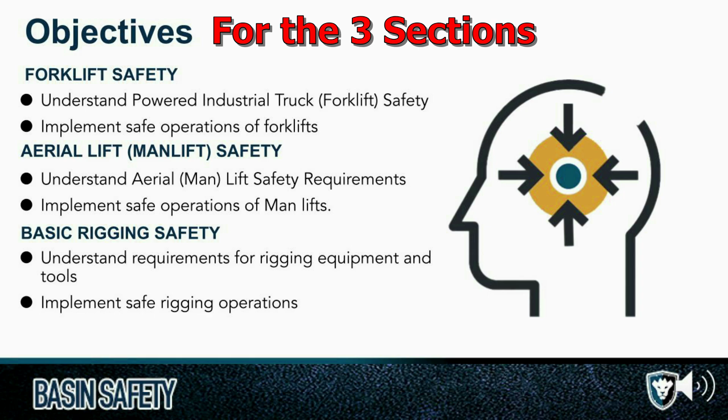Some training objectives for forklift safety: understand powered industrial truck forklift safety, implement safe operations of forklifts. For aerial lift, man lift safety, understand aerial lift, man lift safety requirements, implement safe operations of man lifts. And for basic rigging safety, understand requirements for rigging equipment and tools, and implement safe rigging operations.

First up, industrial trucks. Powered industrial truck and forklift types. OSHA recognizes 11 different designations of industrial trucks divided into 7 classes. Each type of vehicle has specific safeguards. The employer must select the proper type of vehicle to match the hazard profile of the work environment.

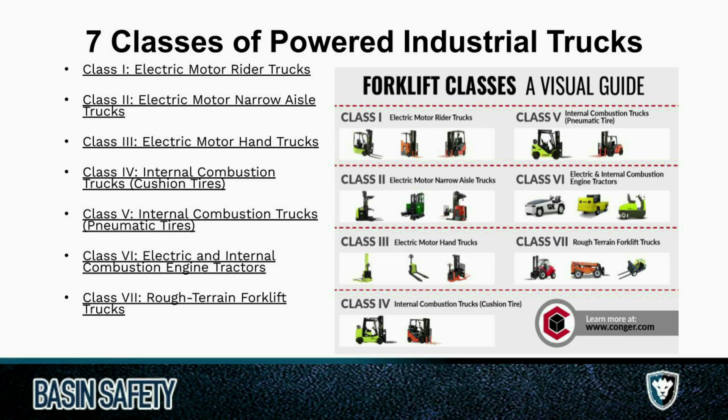7 classes of powered industrial trucks. Class 1, electric motor rider trucks. Class 2, electric motor narrow aisle trucks. Class 3, electric motor hand trucks. Class 4, internal combustion trucks with cushion tires. Class 5, internal combustion trucks with pneumatic tires. Class 6, electrical and internal combustion engine tractors. And Class 7, rough terrain forklift trucks. And to the right here, we have a forklift classes, a visual guide.

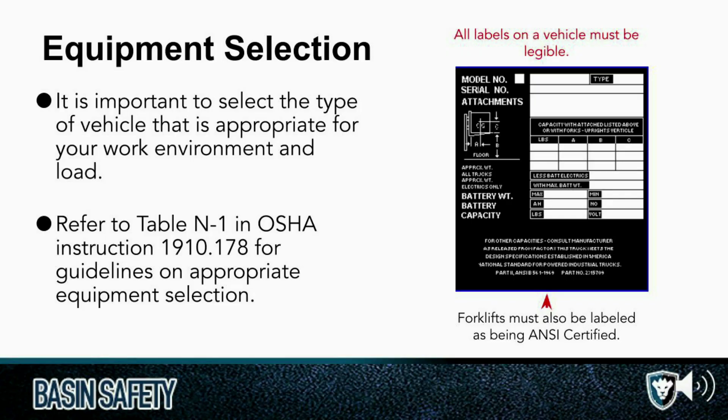Equipment selection. It is important to select the type of vehicle that is appropriate for your work environment and load. Refer to Table N1 in OSHA Instruction 1910.178 for guidelines on appropriate equipment selection. All labels on a vehicle must be legible. Forklifts must also be labeled as being ANSI certified.

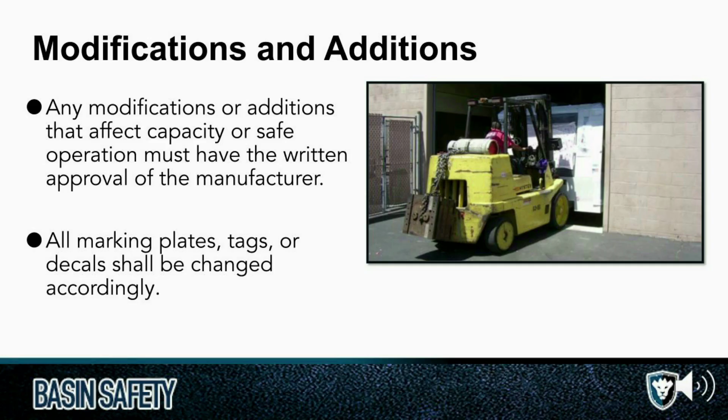Modifications and additions. Any modifications or additions that affect capacity or safe operation must have the written approval of the manufacturer. All marking plates, tags, or decals shall be changed accordingly.

Some atmospheric requirements. Powered industrial trucks can cause fires or other dangers in certain types of environments. Powered industrial trucks are not allowed to be used in atmospheres containing hazardous concentrations of acetylene, butadiene, ethyl oxide, hydrogen, propylene oxide, acetaldehyde, cyclopropane, diethyl ether, ethylene, unsymmetrical dimethyl hydrazine. Section 1910.178 has specific requirements about atmospheric requirements. If your workplace has atmospheric contaminants, consult the rules for proper vehicle selection.

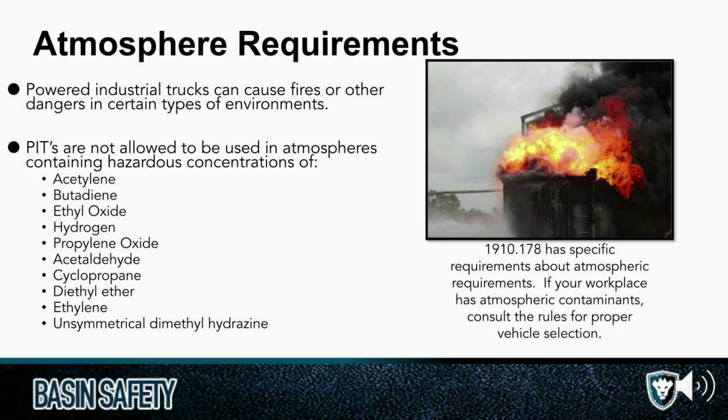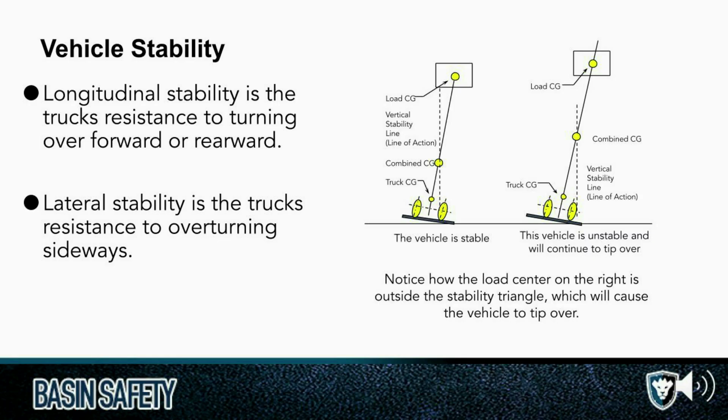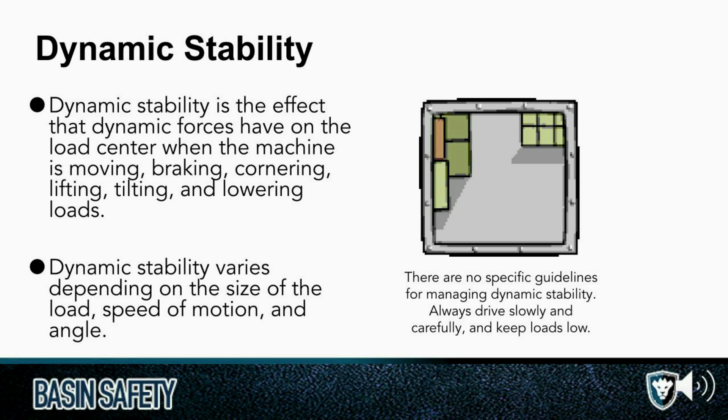Vehicle stability. Longitudinal stability is the truck's resistance to turning over forward or rearward. Lateral stability is the truck's resistance to overturning sideways. Notice how the load center illustrated on the right is outside the stability triangle, which will cause the vehicle to tip over. Dynamic stability is the effect that dynamic forces have on the load center when the machine is moving, braking, cornering, lifting, tilting, and lowering loads. Dynamic stability varies depending on the size of the load, speed of motion, and angle. There are no specific guidelines for managing dynamic stability. Always drive slowly and carefully and keep loads low.

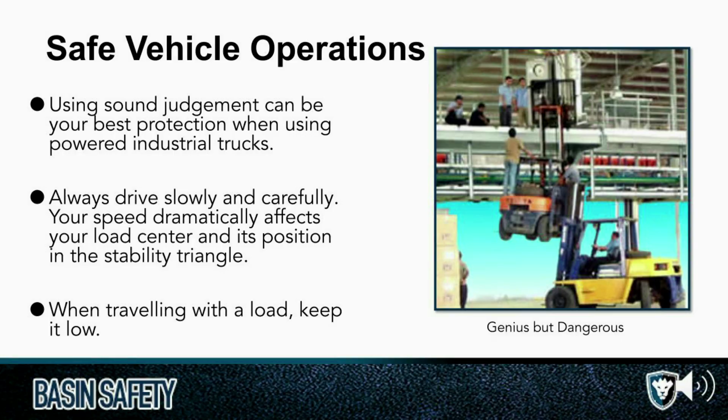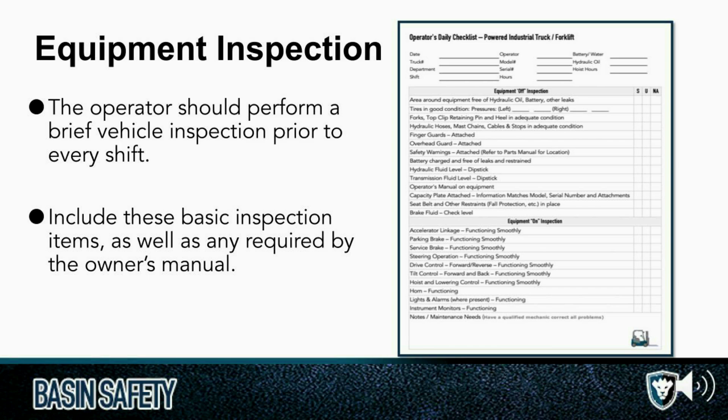Equipment inspection. The operator should perform a brief vehicle inspection prior to every shift. Include these basic inspection items as well as any required by the owner's manual. To the right is an illustration of an operator's daily checklist for powered industrial truck and forklift.

Working on and around vehicles. Do not drive trucks up to people standing or sitting in front of fixed objects. People should not pass below elevated portions of the truck. Only vehicles designed for carrying a passenger may have one. Arms and legs may not be placed outside the mast or the running lines of the vehicle while operating it.

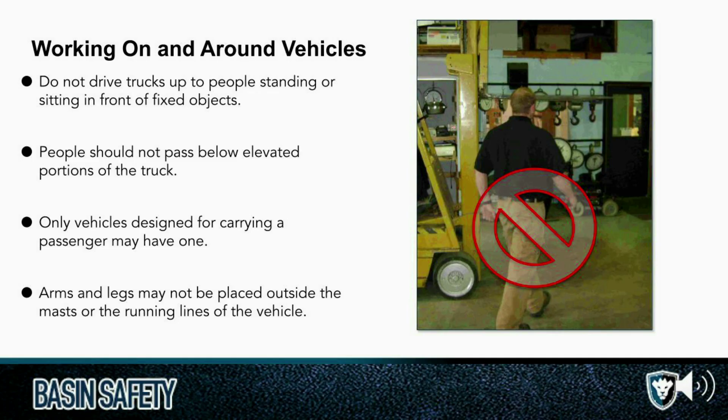Some vehicle entry and exit examples. Always enter and leave a powered industrial truck facing the vehicle. If a sit-down vehicle tips over, remain seated in the operator's seat and lean away from the direction of the fall. If a stand-up rider truck tips over, step backwards off the vehicle to get clear. Most people attempt to jump clear of a tipping vehicle and are crushed by the overhead guard.

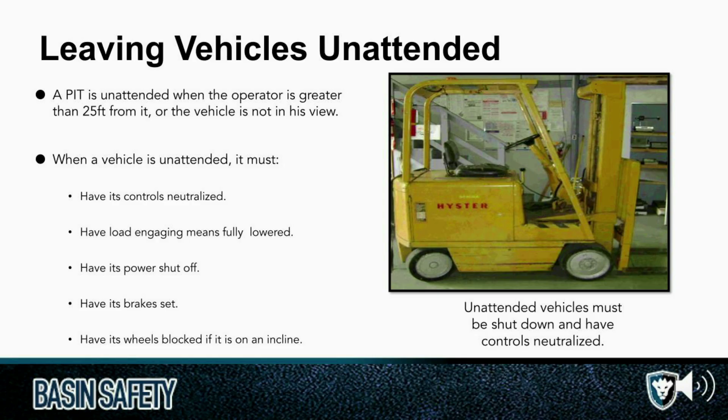Leaving vehicles unattended. A powered industrial truck is unattended when the operator is greater than 25 feet from it or the vehicle is not in his view. When a vehicle is unattended, it must have its controls neutralized, have load engaging means fully lowered, have its power shut off, have its brakes set, and have its wheels blocked if it is on an incline. Unattended vehicles must be shut down and have controls neutralized.

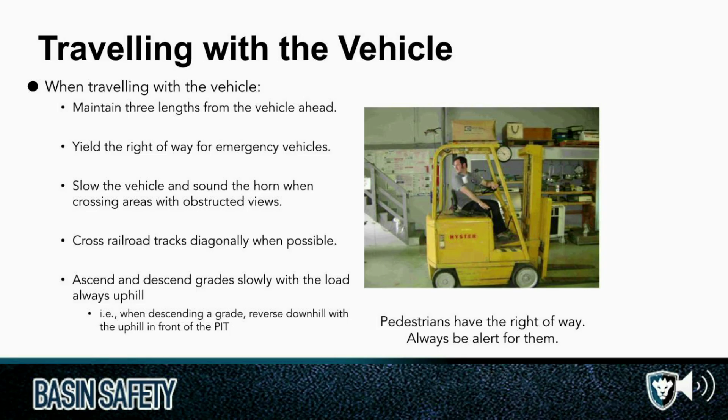Traveling with the vehicle. When traveling, maintain 3 lengths from the vehicle ahead of you. Yield the right-of-way for emergency vehicles. Slow the vehicle and sound the horn when crossing areas with obstructed views. Cross railroad tracks diagonally when possible. Ascend and descend grades slowly with the load always uphill. When descending a grade, reverse downhill with the uphill in front of the powered industrial truck. Pedestrians have the right-of-way. Always be alert for them.

For loading, only stable and safely arranged loads should be handled. Loads must be well below the rated capacity of the vehicle. Trucks with attachments must be operated as partially loaded trucks even when not carrying a load. Before engaging a load, make sure it is below the rating of your vehicle.

For maintenance, vehicles not in a safe operating condition must be removed from service. Only authorized personnel can make repairs. Repairs to fuel and ignition systems must be made in designated areas. The battery must be disconnected before repairs on the electrical system can occur.

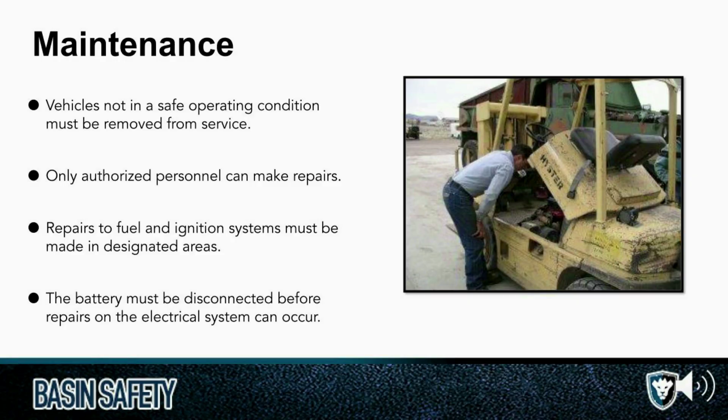Training requirements. This is not a forklift operator training course. No one is allowed to drive powered industrial trucks until they have been trained, certified, and authorized by the employer. The minimum age to drive one is 18 years of age. Trainees must always be supervised while operating.

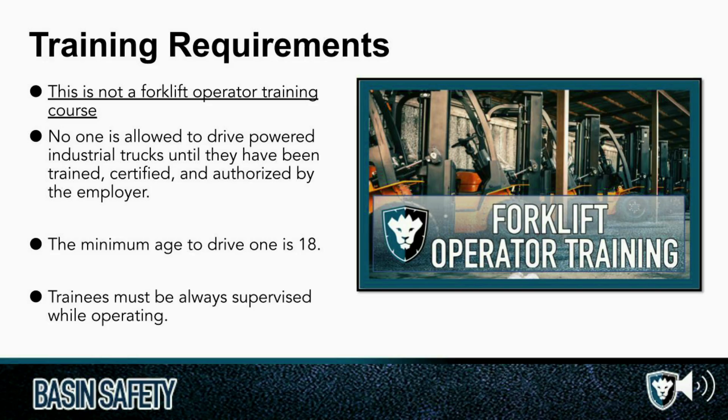The minimum age to drive a powered industrial truck is 18 years of age. Employees must be trained and evaluated in forklift operations prior to operating them alone.

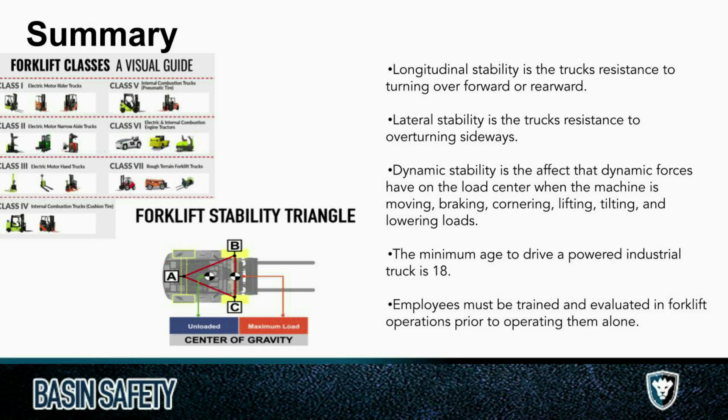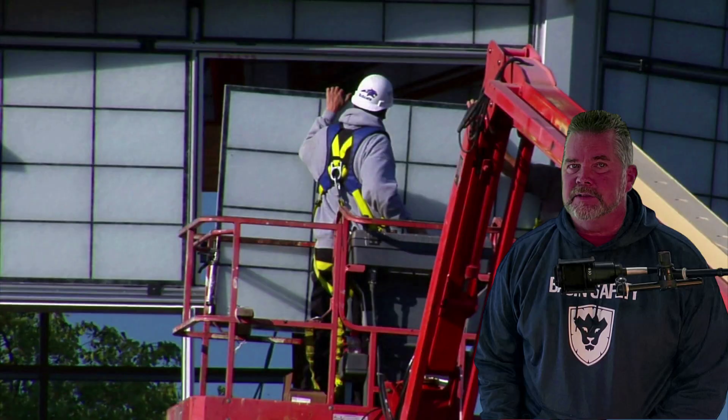Next up, non-qualified aerial lift safety training. Every year, thousands of workers are seriously injured or worse because of mistakes made on aerial lifts. These machines may look simple, but they're among the most dangerous pieces of equipment on a job site if you don't respect the hazards. Falls, tip-overs, electrocution, crushing accidents - they happen fast and often without warning. That's why today's training is so important. We're going to cover the critical rules, real-life examples, and safe work practices you need to know before you ever step onto an aerial lift. Because when it comes to working at height, safety isn't just optional, it's about survival.

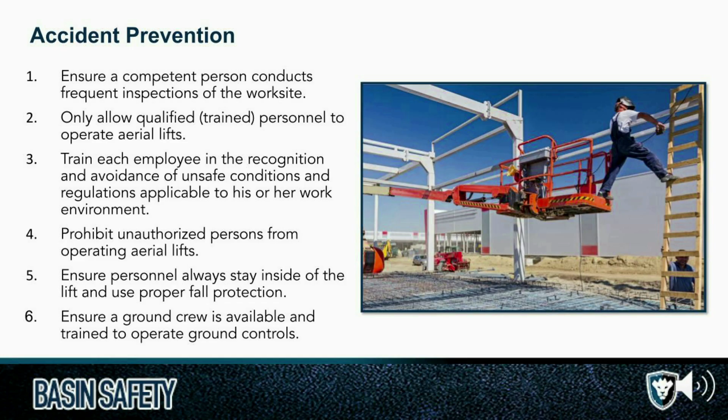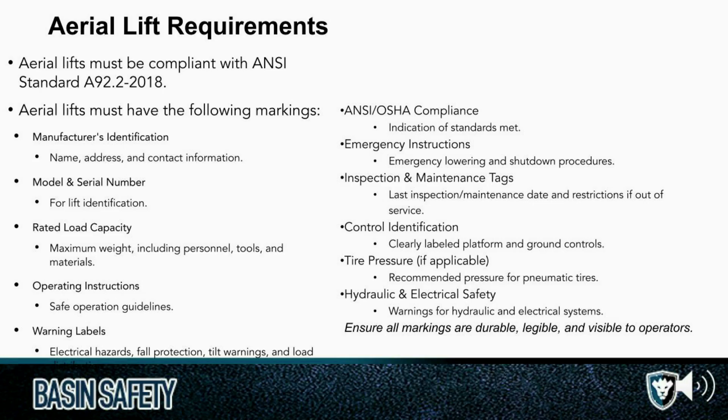Aerial lift requirements. Aerial lifts must be compliant with ANSI Standard A92.2-2018. Aerial lifts must have the following markings: manufacturer's identification - name, address, and contact information; the model and serial number for lift identification; the rated load capacity, maximum weight including personnel, tools, and materials; operating instructions for safe operation guidelines; warning labels for electrical hazards, fall protection, tilt warnings, and load distribution; ANSI and OSHA compliance indication of standards met; emergency instructions for emergency lowering and shutdown procedures; inspection and maintenance tags showing last inspection maintenance date and restrictions if out of service; control identification with clearly labeled platform and ground controls; tire pressure if applicable on the vehicle, recommended pressure for pneumatic tires; and hydraulic and electrical safety warnings. Ensure all markings are durable, legible, and visible to operators.

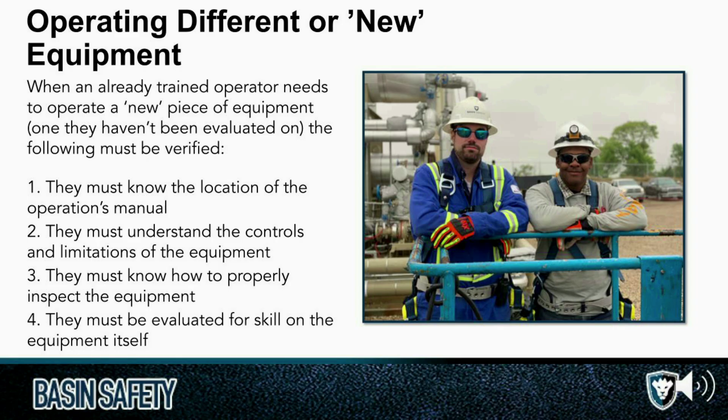Part 3, Aerial Lift Inspection and Maintenance Records.

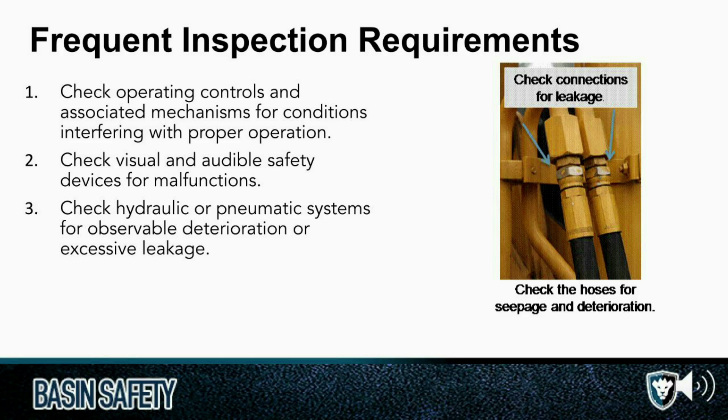Frequent inspection requirements. Number 1, check operating controls and associated mechanisms for conditions interfering with proper operation. Number 2, check visual and audible safety devices for malfunctions. Number 3, check hydraulic or pneumatic systems for observable deterioration or excessive leakage. Check connections for leakage, check the hoses for seepage and deterioration.

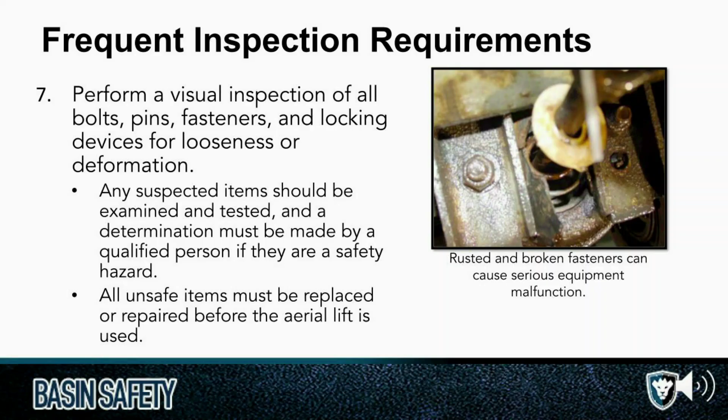Continued here with point 7. Perform a visual inspection of all bolts, pins, fasteners, and locking devices for looseness or deformation. Any suspected items should be examined and tested, and a determination must be made by a qualified person if they are a safety hazard. All unsafe items must be replaced or repaired before the aerial lift is used. Rusted and broken fasteners can cause serious equipment malfunction.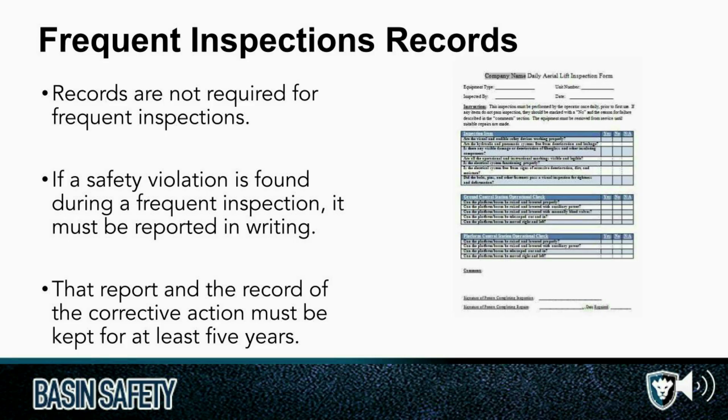Frequent inspection records. Records are not required for frequent inspections. If a safety violation is found during a frequent inspection, it must be reported in writing. That report and the record of the corrective action must be kept for at least 5 years.

Maintenance requirements. Type and frequency of maintenance will be determined by the owner in accordance with the manufacturer's recommendations. The owner must train employees on inspection and maintenance of the aerial device in accordance with the manufacturer's recommendations. All maintenance must be done in accordance with manufacturer's recommendations.

Aerial lift modifications. No modifications or additions that affect vehicle stability, mechanical, hydraulic, or electrical integrity, or safe operation may be made without prior written permission from the manufacturer. If these changes are made, the instructional markings must be changed accordingly.

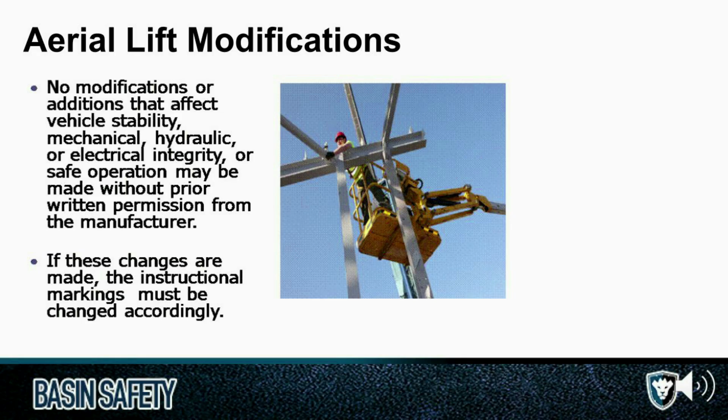Part 4, Aerial lift operations. Pre-start inspection: aerial devices must be inspected prior to each day's operation. The operator must perform the inspection in accordance with the frequent inspection requirements. All unsafe items must be replaced or repaired before use. Here's an example of an inspection sheet to the right.

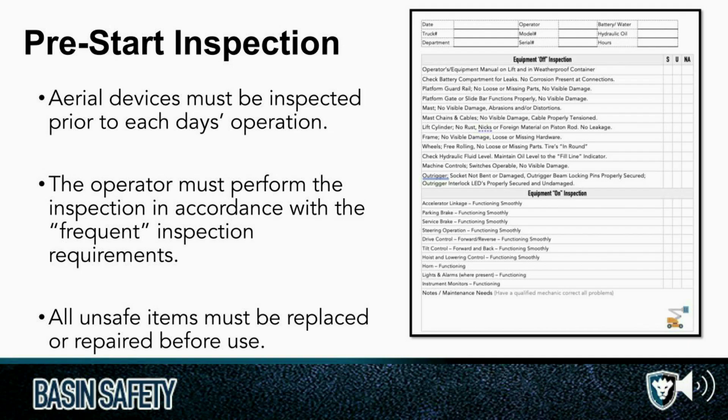Weather conditions to be aware of. Before using aerial lifts outdoors, weather conditions should be checked. Lifts should not be used when there are storms, high winds, or the possibility of lightning.

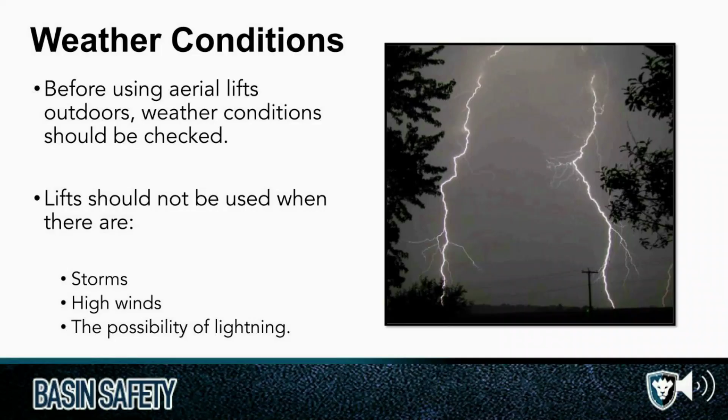Work area hazard survey. Before an aerial device is used, the work area must be surveyed for hazards such as unstable soil or earth, holes, ditches, drop-offs and floor obstructions, debris, overhead obstructions, possible electrical contacts, and presence of unauthorized persons. Aerial lifts may not be used unless these hazards are managed or eliminated. Potholes and ditches are hazardous and should be avoided.

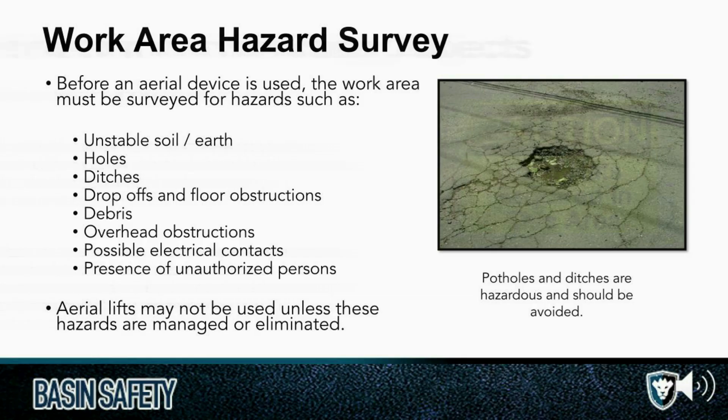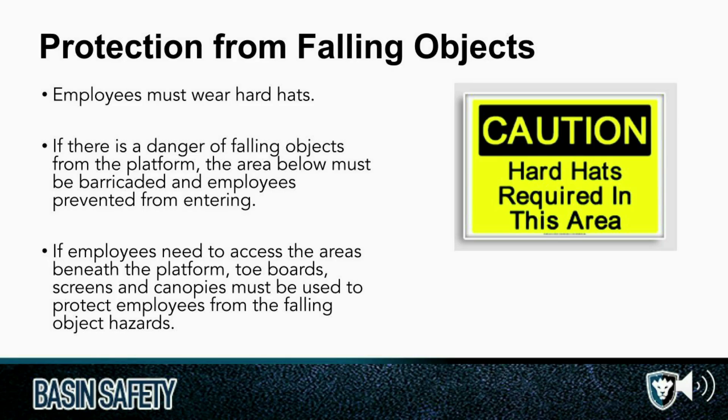Protection from falling objects. Employees must wear hard hats. If there is a danger of falling objects from the platform, the area below must be barricaded and employees prevented from entering it. If employees need to access the areas beneath the platform, toe boards, screens, and canopies must be used to protect employees from falling object hazards. And if you see this sign to the right, caution, hard hats required in this area, of course, don your hard hat.

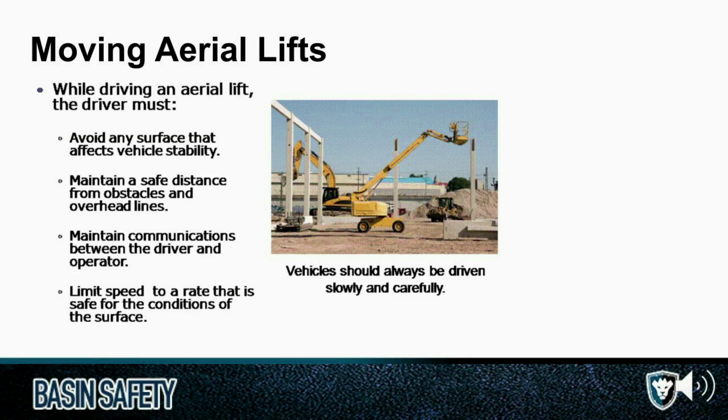Moving aerial lifts. When driving an aerial lift, the driver must avoid any surface that affects vehicle stability, maintain a safe distance from obstacles and overhead lines, maintain communication between the driver and operator, and limit speed to a rate that is safe for the conditions of the surface. Vehicles should always be driven slowly and carefully.

Working requirements. Employees must stand on the floor of the basket and cannot sit or climb on the guardrails or use other devices to establish work positions. A harness attached to the boom or basket must be worn. Harnesses should be connected to a lift structural member anchor point. Guardrails must be installed. Never exceed the load capacity of the aerial lift. Do you know what your aerial lift capacity is? Good thing to find out.

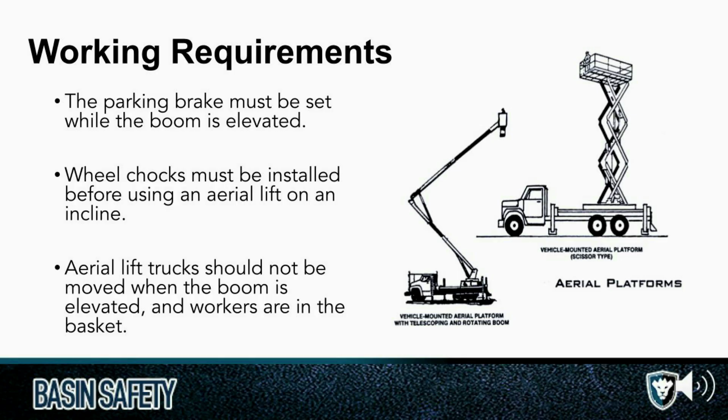Working requirements. The parking brake must be set while the boom is elevated. Wheel chocks must be installed before using an aerial lift on an incline. Aerial lift trucks should not be moved when the boom is elevated and workers are in the basket.

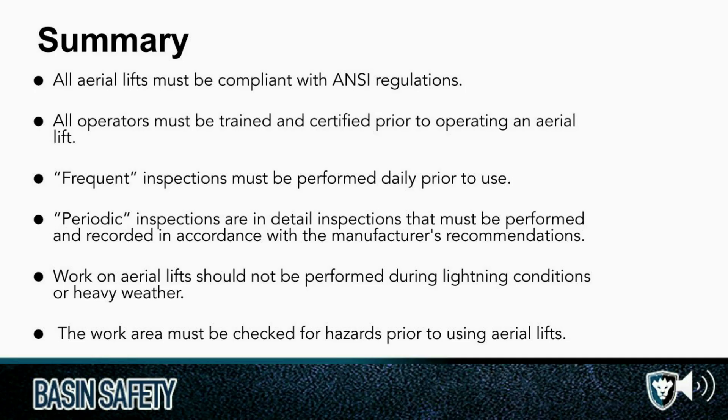In summary, all aerial lifts must be compliant with ANSI regulations. All operators must be trained and certified prior to operating an aerial lift. Frequent inspections must be performed daily prior to use. Periodic inspections are in-detail inspections that must be performed and recorded in accordance with the manufacturer's recommendations. Work on aerial lifts should not be performed during lightning conditions or heavy weather. The work area must be checked for hazards prior to using aerial lifts.

Next up, non-qualified rigging safety training. Rigging is one of the most critical and dangerous tasks on a job site. A single mistake in choosing the wrong sling, ignoring a load's center of gravity, or rushing a lift can turn a routine job into a disaster in seconds. Every year, workers are injured and millions of dollars in equipment are lost because someone cut corners on rigging safety.

That's why today's training matters. We're going to cover the fundamentals of safe rigging, real-world accidents you can learn from, and the right practices that keep both people and property safe. Because when it comes to lifting heavy loads, the margin for error is zero.

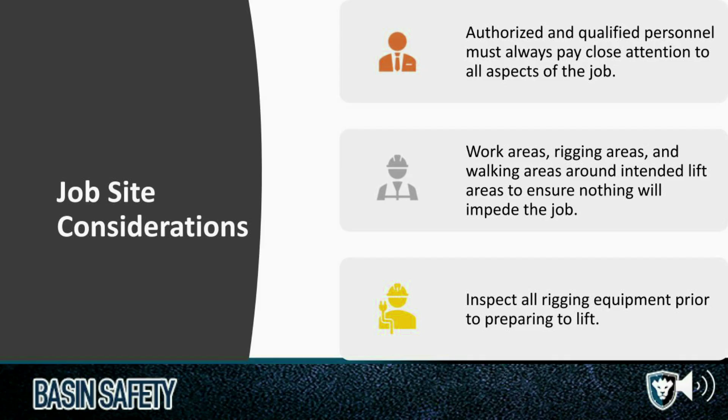Number 1, selecting your rigging. Knowledgeable personnel should select the rigging. Number 2, rigging condition must be of the appropriate type, have proper identification, and been inspected and is certified. Number 3, load limits, load weight, center of gravity, sling angle, side loading considerations, and gear capacity.

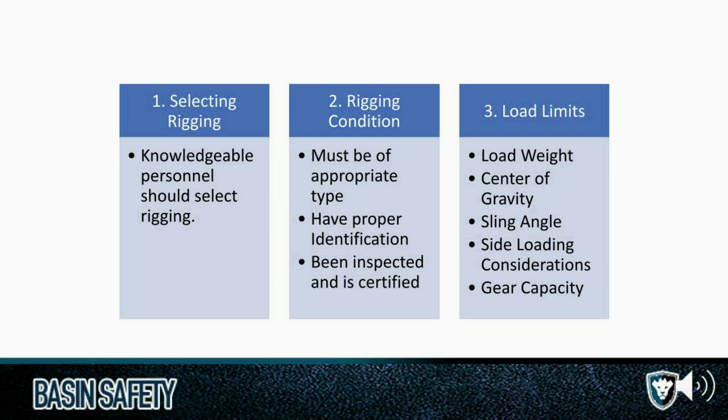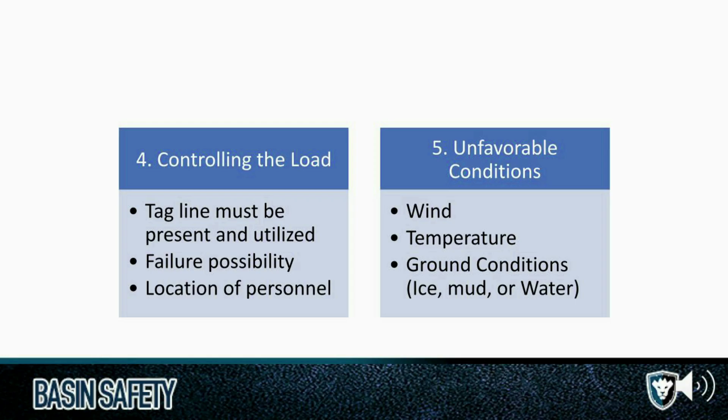Number 4, controlling the load. Tagline must be present and utilized, must be aware of failure possibility and location of personnel. Number 5, unfavorable conditions, high winds, temperature, ground conditions such as ice, mud, or water.

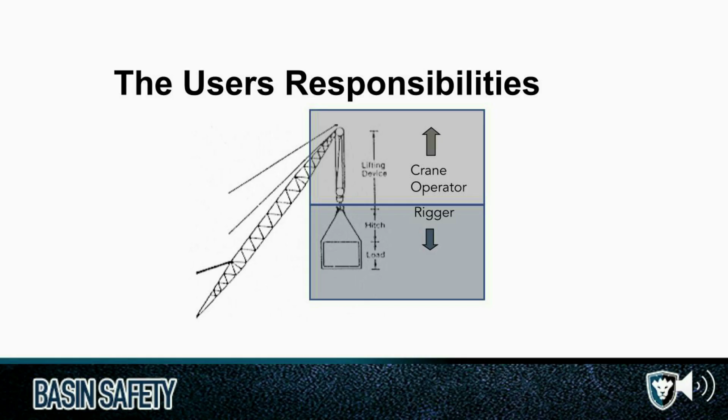The user's responsibility. Above the line illustrated here is the crane operator's responsibility. Below the line is the rigger's responsibility. The rigger's responsibilities, UFC: Utilize, Follow, and Conduct. Utilize appropriate rigging gear suitable for overhead lifting. Follow industry standards and the manufacturer's recommendations. Conduct regular inspection and maintenance of the rigging gear.

Inspection requirements. Daily inspection should be performed at the beginning of each shift or before initial use of the crane, each shift by the operator or appointed person.

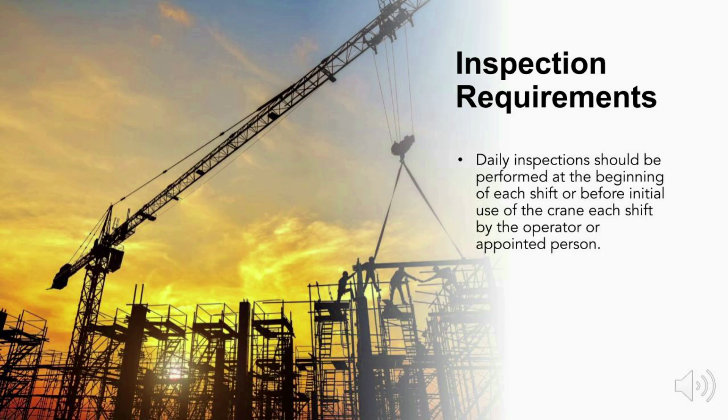Some notes about slings. Sling capacity varies from manufacturer to manufacturer. User must look at individual sling capacity tag to determine safe lifting capacity of that sling. If the tag is not readable or missing, do not use it. Inspect sling before each day's use and as often as necessary during the day. Sharp edges can sever a sling immediately when the load is tensioned. Use softeners or padding on corners.

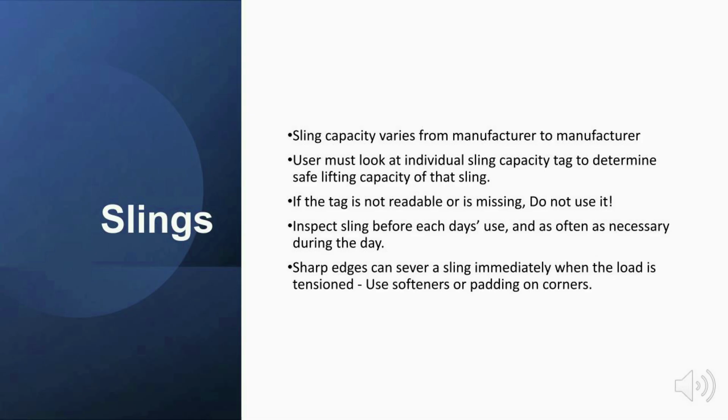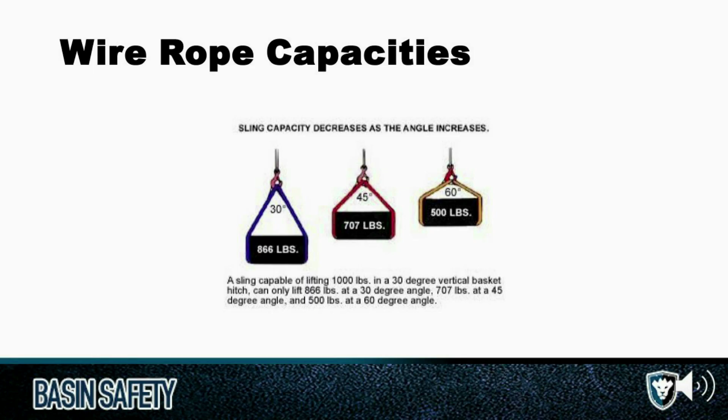Here's some examples of types of wire rope slings. Wire rope capacities: sling capacity decreases as the angle increases. At 30 degrees, 866 pounds. At 45 degrees, 707 pounds. At 60 degrees, 500 pounds. A sling capable of lifting 1,000 pounds in a 30-degree vertical basket hitch can only lift 866 pounds at a 30-degree angle, or 707 pounds at a 45-degree angle, and 500 pounds at a 60-degree angle.

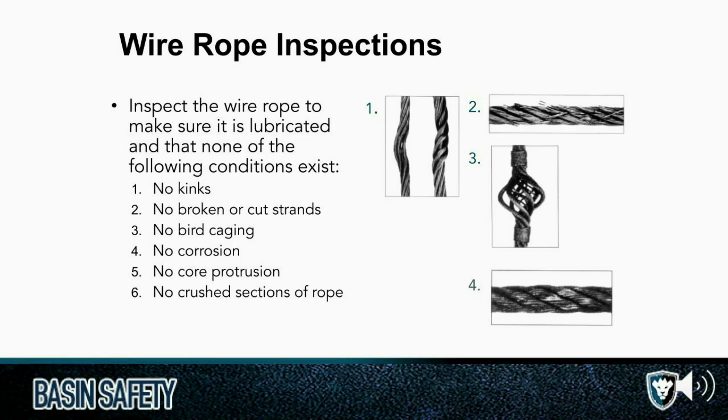Wire rope inspections. Inspect the wire rope to make sure it is lubricated and that none of the following conditions exist: Number 1, no kinks. 2, no broken or cut strands. 3, no bird caging. 4, no corrosion. 5, no core protrusion. And 6, no crushed sections of the rope.

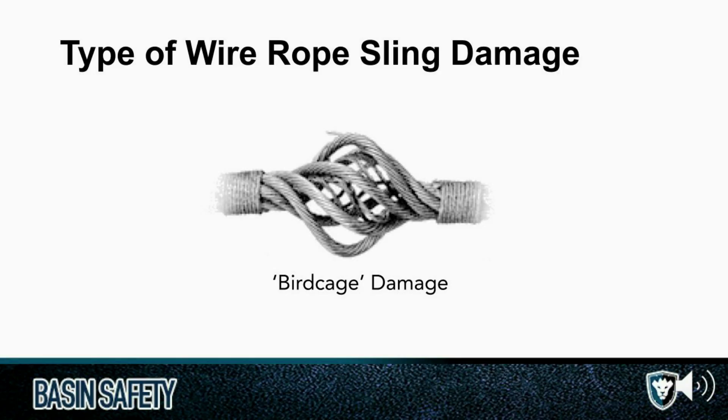Type of wire rope sling damage. This example is a bird cage damage. Type of wire rope sling damage. Damage as a result of a kink in the wire rope.

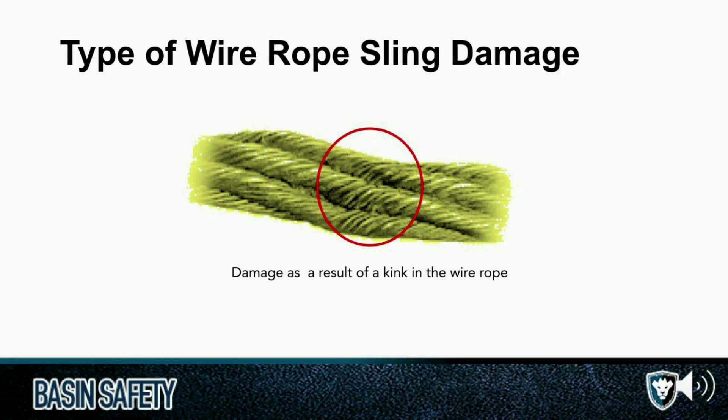Synthetic slings. A synthetic sling is a type of lifting device made from durable synthetic materials such as nylon, polyester, or polypropylene designed to securely lift and transport loads. These slings are widely used in industries like construction, manufacturing, and logistics due to their flexibility, strength, and lightweight design. Synthetic slings must be inspected before each use for signs of wear, damage, or chemical degradation to ensure safe operation. Always adhere to manufacturer guidelines for load capacity and proper use.

Chain slings. Only grade 8 or better alloy chain can be used for overhead lifting purposes. All chain is not rated the same. Chain must have a capacity tag attached to it. Chains will withstand more rough handling and abuse, but a chain with the same rated lifting capacity of wire rope will be much larger in diameter and heavier in weight.

Chains must be inspected daily before use and as often as necessary during use to assure safety. It is the rigger's responsibility to do the inspections. Some examples of chain slings.

Rigging protection from cutting or slipping. Softeners, padding, or use of blocking in these examples.

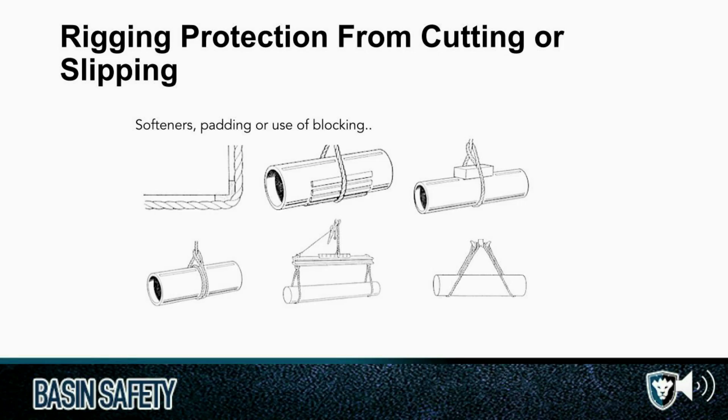Basic sling operating practices, according to ANSI B30.9. Each day before use, the sling, all fastenings, and attachments shall be inspected for damage and defects by a competent person. Additional inspections shall be performed during sling use as often as necessary to assure the safety of the operation.

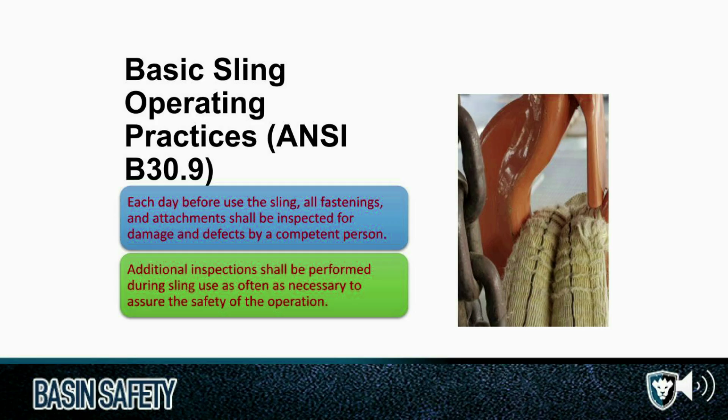Basic sling operating practices, again ANSI B30.9. Replacement criteria.

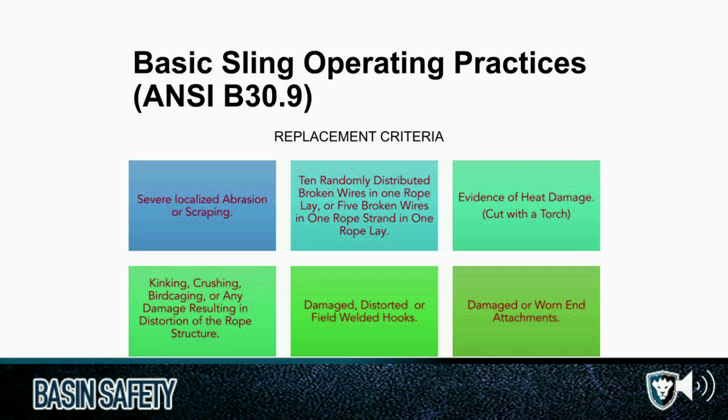Some safety factors. To guard against failure of a wire rope in service, the actual load on the rope should only be a fraction of the breaking strength. The safety factor includes reduced capacity of the rope below its stated breaking strength due to wear, fatigue, corrosion, abuse, and variations in size and quality.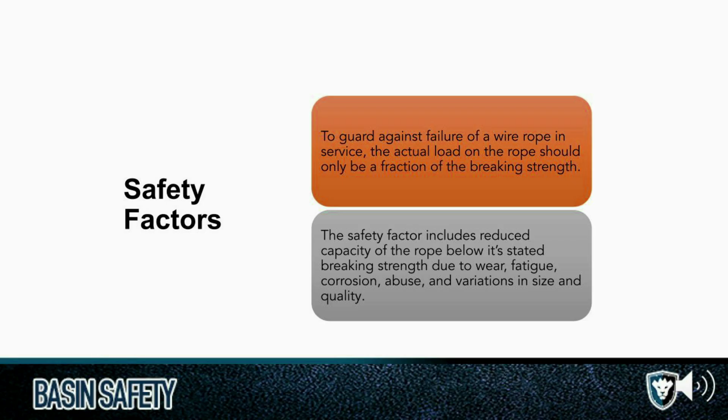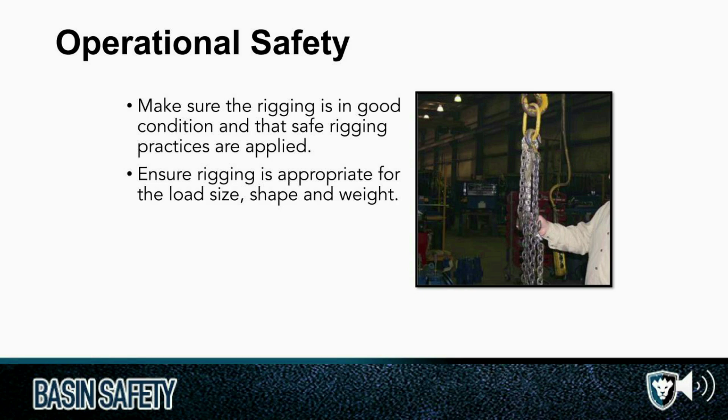Operational safety. Make sure the rigging is in good condition and that safe rigging practices are applied. Ensure rigging is appropriate for the load size, shape, and weight.

functioning properly before continuing with the lift. Operational safety. Do not overload the crane or hoist. Make sure the combined weight of the lifter and load does not exceed the rated load capacity of the crane or hoist. Refuse to make lift if you are unsure of any issues. Do not proceed until all issues are resolved. Operator is in control of the lift and has complete authority to stop the lift for any safety reason.

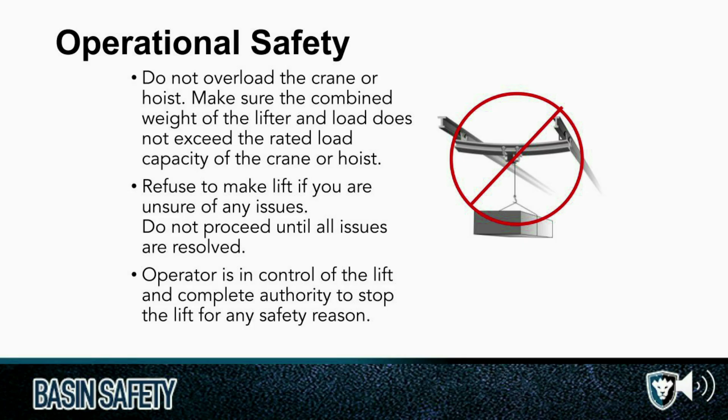Operational safety. Only allow one person to give hand signals. Do not ride or allow other people to do so.

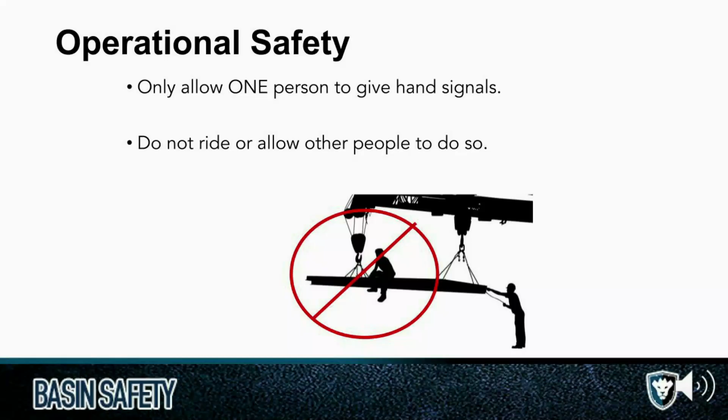Operational safety. To pick up a load, direct the crane and hoist hook directly above the load to eliminate the possibility of side loading and minimize load swing.

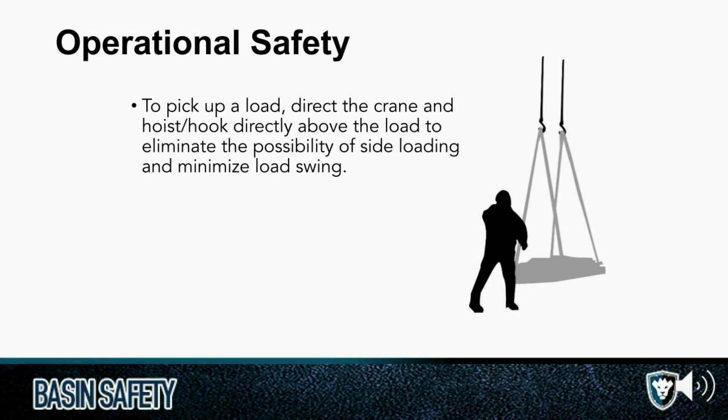Operational safety. Always maintain a clear view of the crane path so you can observe any obstacles or personnel in your path.

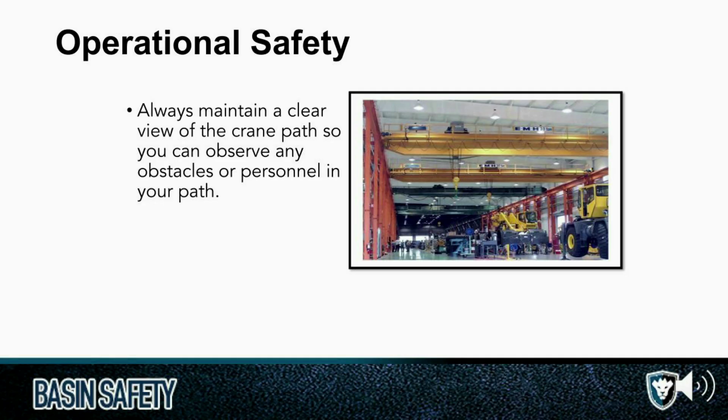Operational safety. Never leave a suspended load unattended. If you must leave the area, lower the load to the ground before doing so.

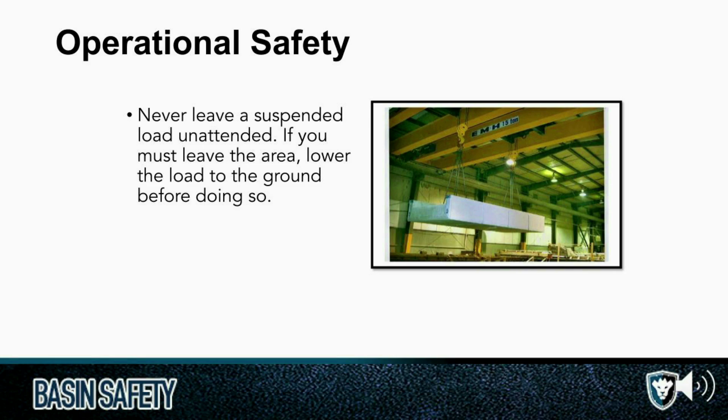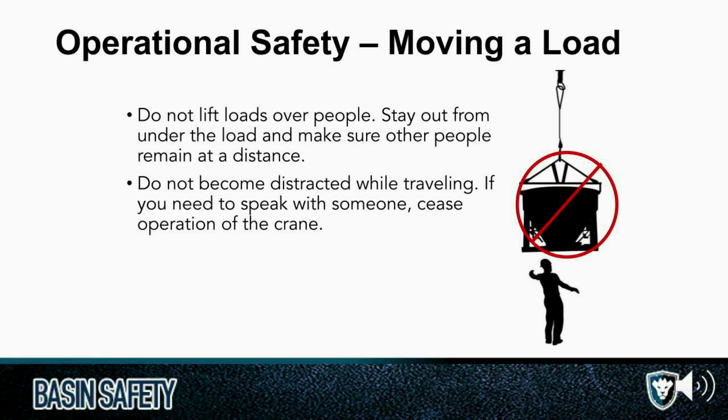Operational safety. Moving a load. Stay clear while moving a load. Do not allow the load to swing. Use a rod to push the load, or a tag line to pull the load. Exercise caution with sheet lifters. Be sure to keep the load level. Tilting the lifter could cause the load to slide off the lifter.

These are some examples of standard hand signals. The hand signal on the left is to lower the load, pointing down. Hand signal on the right, pointing up, is to hoist the load.

More standard hand signals. Hoist load slowly, with the finger pointing up to the hand covering above. Lower load slowly, as illustrated on the right.

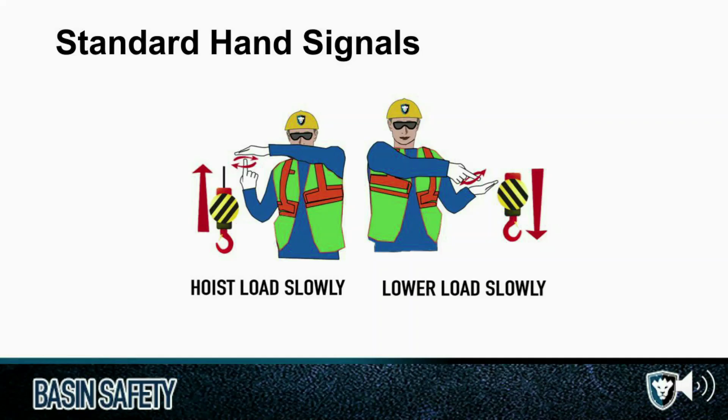More standard hand signals. Bridge travel left, indicating to the left of the person's hand, and bridge travel right, indicating to the right of the person's hand.

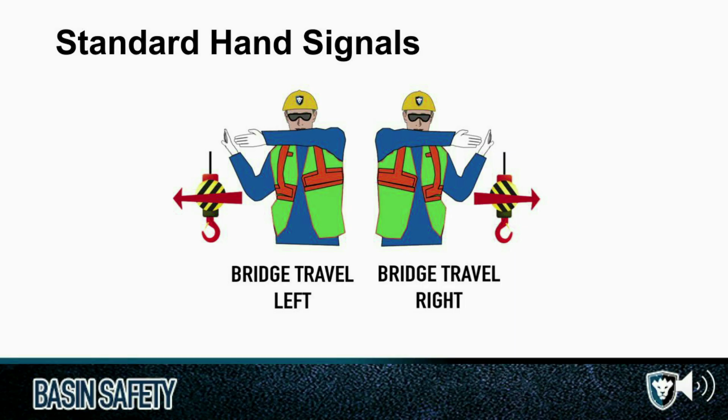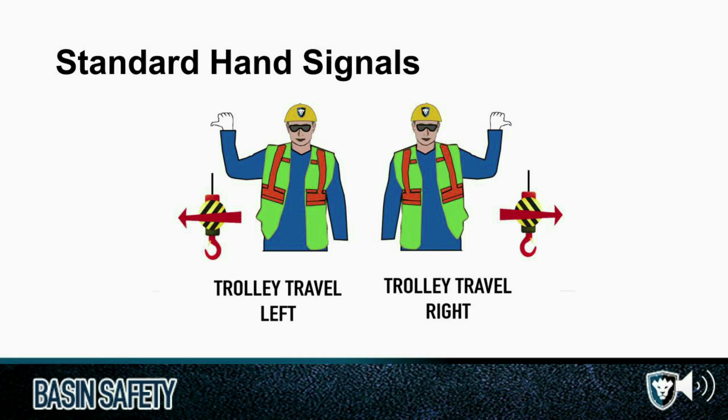Here's a standard hand signal for stop. That's basically a wave across the body, moving from right to left.

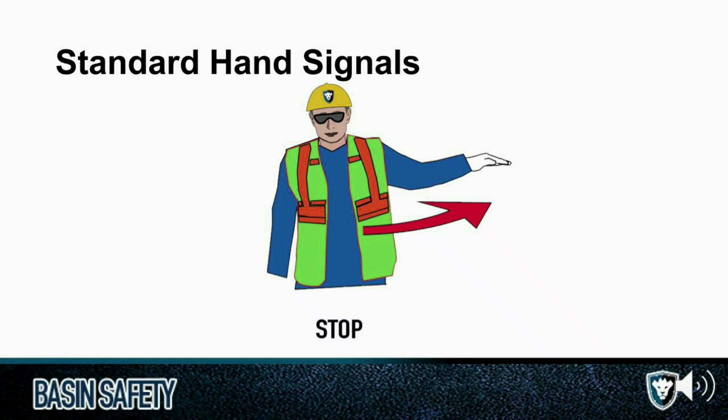This concludes this Basin Safety training module. If you didn't pause the video at various points to run through some practical exercises, please do so at this time.

Just like I learned as a soldier back in the Army basic training days, and this is especially true when it comes to safety, practice makes perfect. Practice helps to retrain your natural habits so you perform better when it really counts. Those precious few seconds between knowing exactly what to do versus wondering, running around like a headless chicken screaming the sky is falling, can be the difference between life and death.